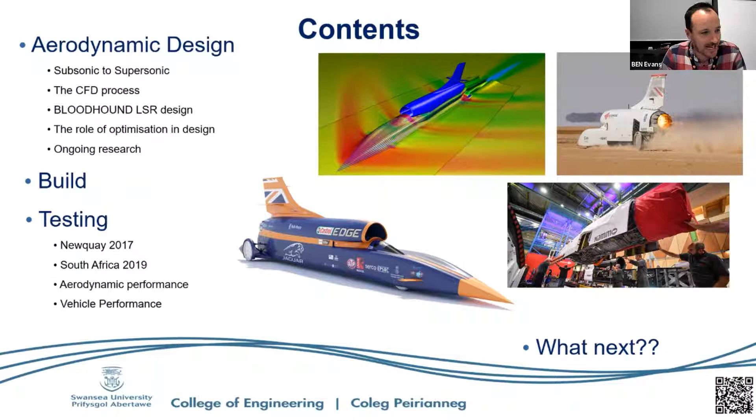So just in case there are any of you out there who aren't sure what the Bloodhound project is all about, or need a little recap, I'm going to play you a short movie. I'm going to cross my fingers that all of the streaming and audio works on this. Hopefully this will give you a feeling for what this project is all about from a technical engineering perspective.

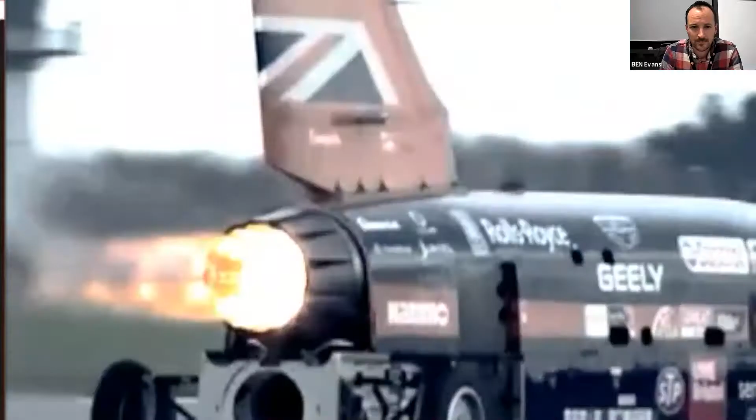So I hope that has whetted your appetite for what is to come.

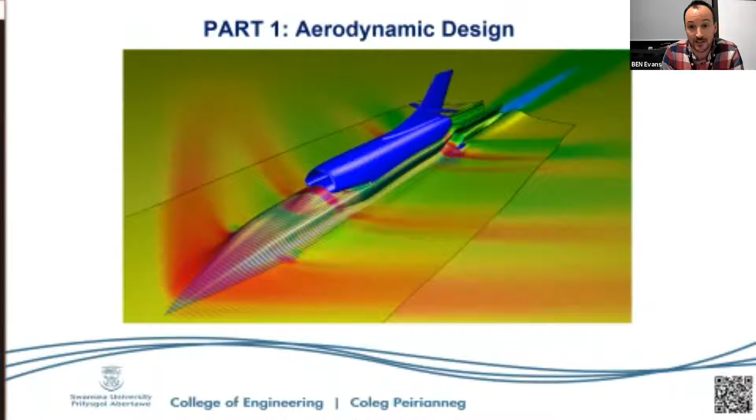Part one of this talk is all about aerodynamic design. When we were approached here at Swansea University back in 2007, I was just coming out of my PhD years, and we were asked to take the lead on the aerodynamic design for this new initiative of Richard Noble, a very brave, adventurous chap who held the land speed record back in the 1980s, was the director of the Thrust Supersonic Car that still holds the land speed record today. And we bravely, or foolishly, depending on which way you look at it, took him up on that challenge.

We said, okay, we've got the technology here to do this, we'll help you out. But it quickly became apparent to us that this was a massive undertaking. The ambition back in 2007 was to design the fastest car in the world, a land speed record vehicle capable of 1,000 miles per hour across the surface of the Earth.

To put that into perspective, at that time and still to this day, the fastest car that had traveled across Earth as a land speed record car was Thrust SSC, reaching speeds of 763 miles per hour, just above the speed of sound.

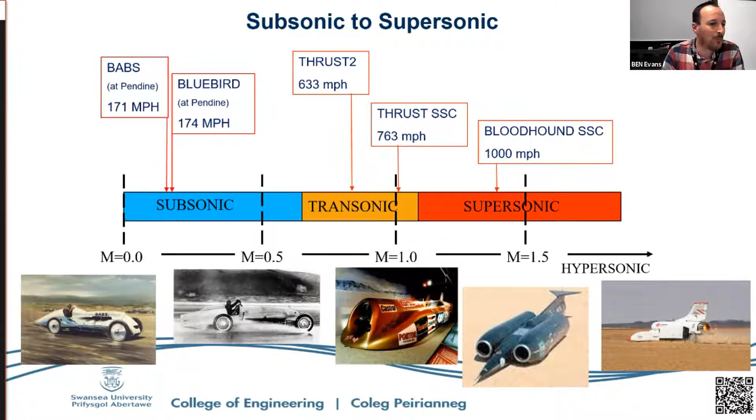But when we started looking at this and how much of a challenge this is going to be, we quickly realized that to push deep into that supersonic speed regime, where you're traveling significantly faster than sound itself travels, was going to be a task.

At these kinds of speeds, vehicles, which are usually aeroplanes, generate shock waves. Those shock waves are very sudden, almost instantaneous changes in the pressure field, the distribution of pressure around the vehicle. Of course, aircraft have the luxury that they're out in the atmosphere, they've got a lot of space around them, so these shock waves can fan out around the aircraft.

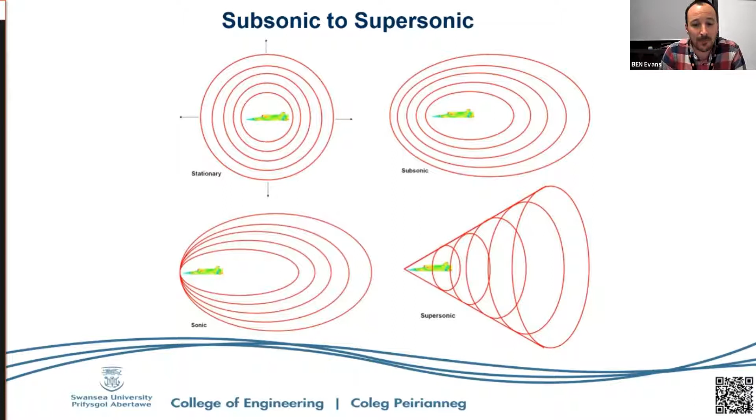But by definition, a land speed record vehicle is a car on the ground. And it quickly became apparent to us that trying to get our heads around how these shock waves would interact with the ground plane across which the car was rolling, whether those shock waves would reflect off the ground, damage the ground, affect the wheels, and the way the wheels interacted with the ground, was going to be a big part of understanding whether or not this was even possible.

In the past, certainly going back 20 or 30 years, automotive aerodynamic design or aerodynamic analysis would have been done using a real physical wind tunnel. Now, we chose early on not to go down this road with Bloodhound for a whole bunch of reasons, one of which is they're very, very expensive. We do have an impressive suite of wind tunnels here at Swansea University.

But unfortunately none where you could, first of all, get the flow speed up to supersonic speeds, and more importantly, or a bigger challenge again, actually roll the ground plane underneath the model at supersonic speeds. They're not only extraordinarily expensive to use as a design tool, they're very slow to use because every time you want to test something new, you physically have to change the model, manufacture a new model, or tweak the model in the real world.

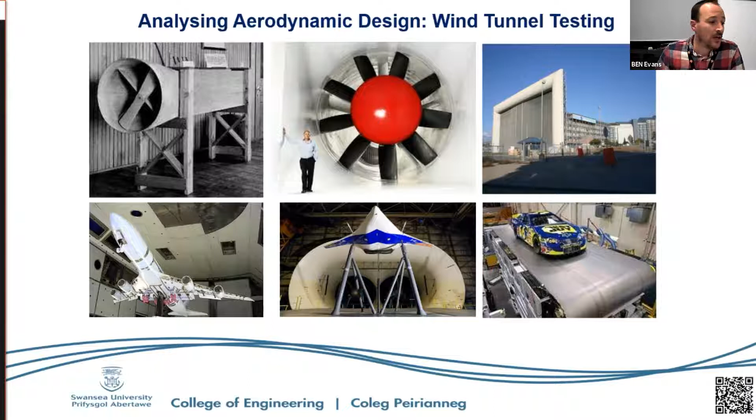So we decided all the way back in 2007 that the way we were going to design this car from an aerodynamic design perspective was using computer simulation. We are extremely fortunate here in Swansea to have world-leading computer simulation technologies at our disposal.

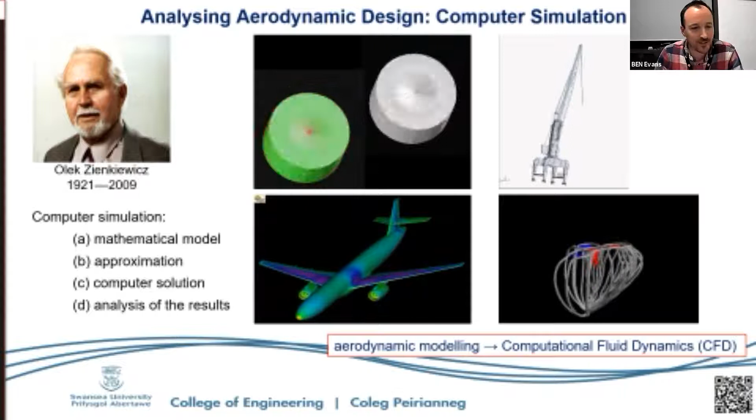I was lucky enough to spend quite a bit of time with Olek in the last few years of his life. Every Friday afternoon, I would go and see Olek at his home in Mumbles, a little village just outside Swansea where he lived. Although his health and eyesight were deteriorating towards the end of his life, he was as bright as a button and was still getting lots of correspondence from academics around the world asking him for his advice. I used to sit with him in his study and read letters to him, and he would dictate responses for me to write. So I got to know Olek very well.

And he pioneered a lot of the tools that we've used on Bloodhound.

Now, essentially, computational or computer simulation boils down to a number of steps. Whatever method you're using, it basically boils down to: do we understand this problem well enough, do we understand the physics well enough to describe it mathematically? Can we write down a set of equations that describes the phenomenon? That's the first challenge.

If you can do that, we then ask ourselves: can we solve this equation? Very often in the real physical world, those equations are complex, coupled, often differential or partial differential equations. We come to the conclusion that it's very, very difficult, if not impossible, to solve them exactly. So instead, we solve them approximately, coming up with approximate solutions to those equations.

We then realize that in order to even get approximate solutions to those equations, we're going to need some very powerful computers. That's where computers step in and help us out. And the final part of the process is to look at all the data that these computer simulations provide us with, and do something with that - visualize it or process it.

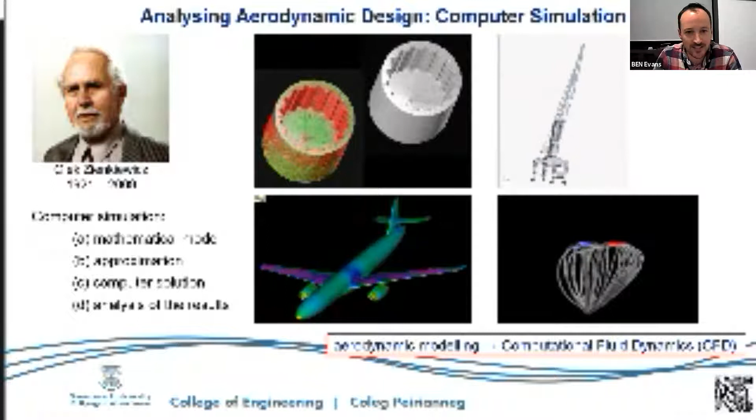Now, in the context of aerodynamics and aerodynamic modeling, we call this field computational fluid dynamics, or more easily the acronym CFD. So when you hear me this evening talking about CFD, this is exactly what we're talking about - it's virtual wind tunnel testing, essentially.

Now, as I mentioned at the start, I'm not going to go into too much detail this evening on the actual CFD method we've used, because over the years I've given many, many lectures going into the details of this. If you're particularly interested, there's a reference to a paper we published almost a decade ago looking into the specific methods we've used.

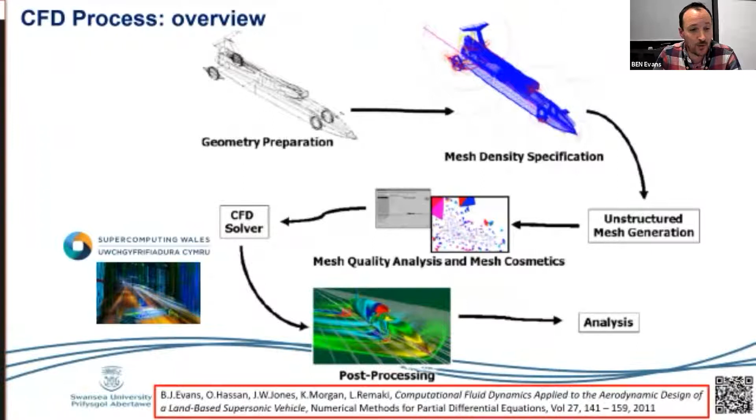But it is worth mentioning this evening that we had a lot of support over the years from a whole range of people providing us with computer resource, one of which is the Supercomputing Wales organisation, who provided us with one of the largest supercomputers in the country to run our simulations on.

Now, at the end of the CFD process, the thing that we actually study as aerodynamic designers to help us evolve the design of a vehicle, in this case Bloodhound, often looks something like this. What we've done with the data from the computer simulation is process it so we can see the pressure field - on the far left, the underside of the car, and on the right-hand part of that figure, the actual surface the car is rolling across.

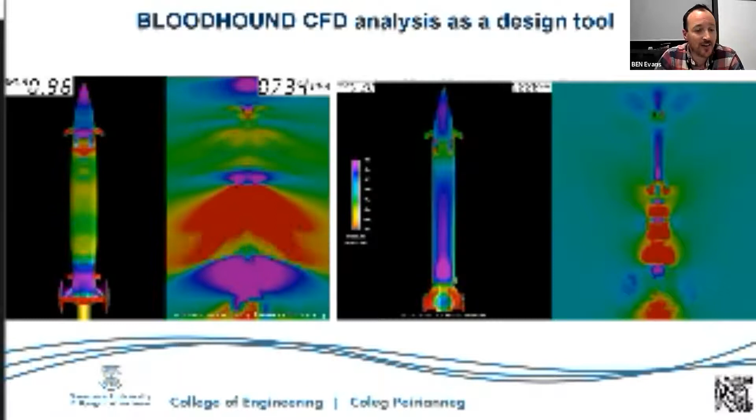In this image, what we're seeing animated on the left is one of the very early configurations of Bloodhound, before we'd solved a lot of the aerodynamic headaches we hit up against. You can see, particularly at the back of the car, the underside, that there are some big changes in the pressure the underside of the car is experiencing.

And those pressures translate into forces. So we were also predicting huge force changes as the car accelerated from low subsonic through to supersonic speeds. We use this sort of analysis to help us evolve the design of the car - I'm hoping we're going to see this.

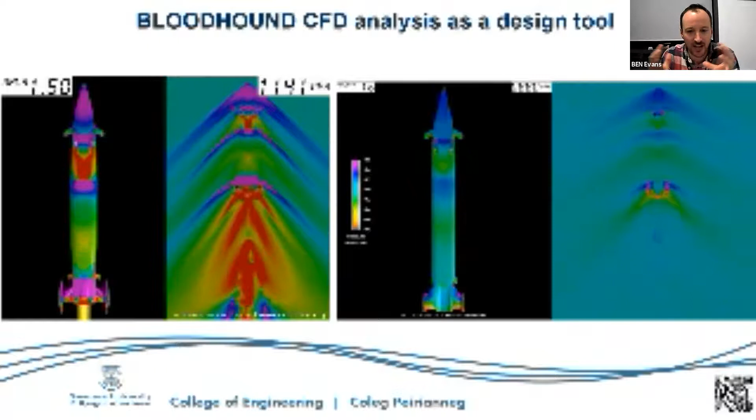So on the right-hand side, there are some subtle but significant changes, particularly at the back of the car, which is at the bottom of the vehicle in this image. One of the things hopefully you can spot is that the size of those pressure variations as the car is accelerating, as the Mach number is changing, are massively reduced on the right-hand side. And that was one of the big headaches we had to overcome during the design process.

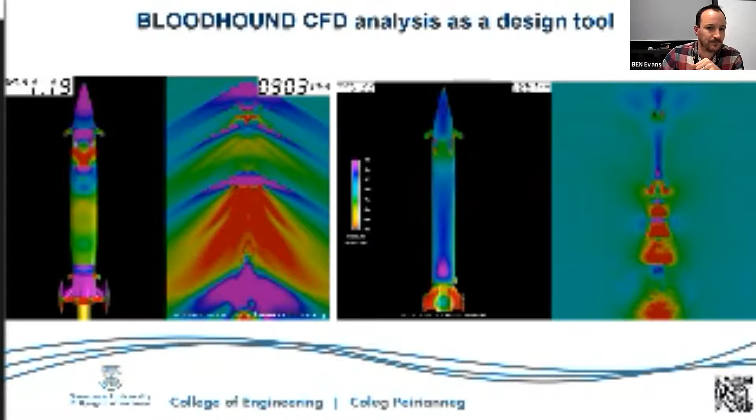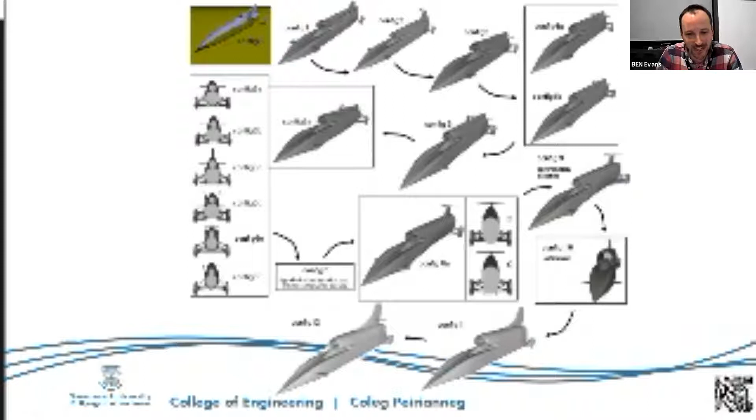So to cut a long story short, we went round this design loop many, many times. Between 2007 and 2015, over 7 or 8 years, we went round this loop. What's displayed here looks like 12 times, but in reality it was a lot more. Every time we changed something to do with the external geometry of the car, it would come to me, we'd run our suite of CFD simulations to understand the aerodynamics, and then I'd provide guidance to the other engineers on where we should go next. Eventually we ended up with the final configuration, config 12, which was the car we actually built.

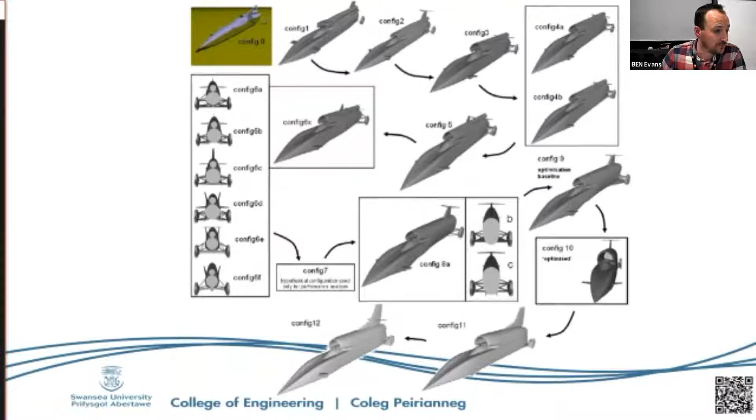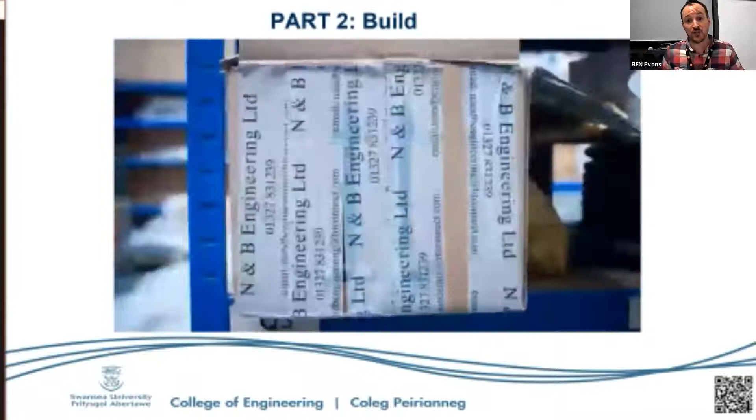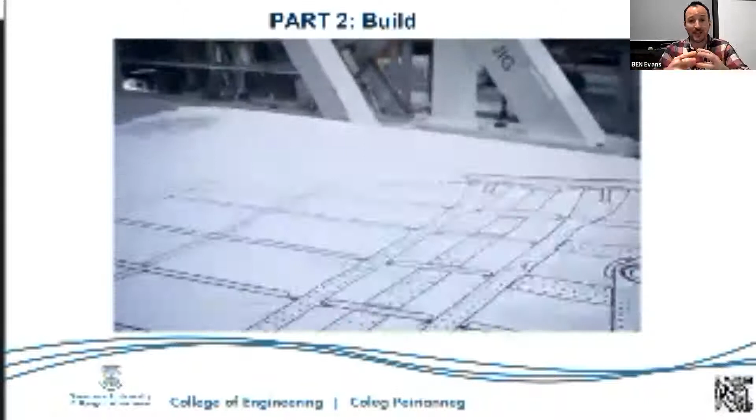This is the point in the process where I got to sit back and relax. We're talking about 2015, 2016, that sort of time, where we here at Swansea provided the outer mould shape the car needed to be to keep drag as low as needed, and also a shape where we could control the lift acting on the car and its distribution, all the way from low speed up to Mach 1.3.

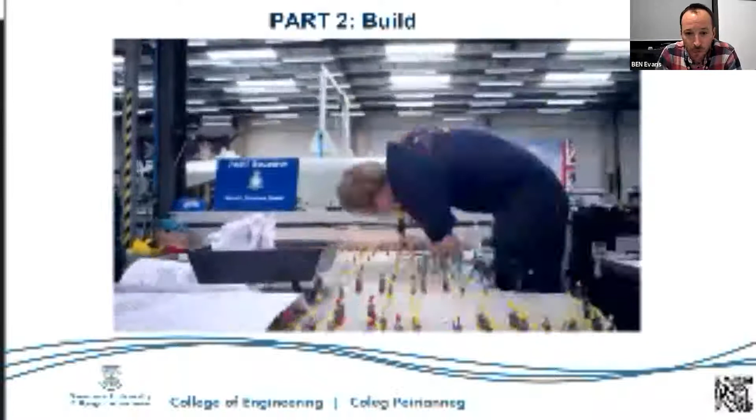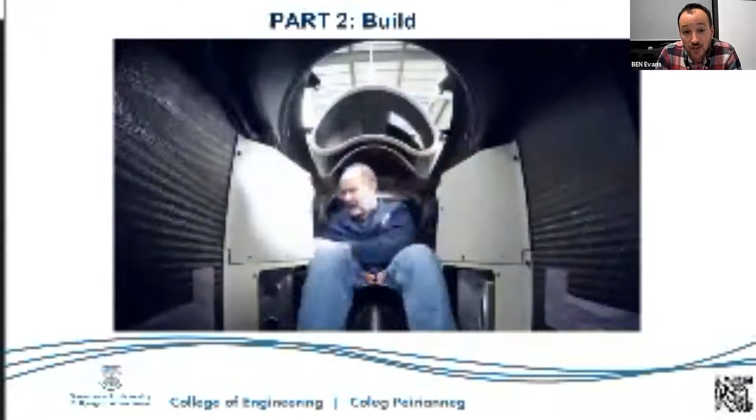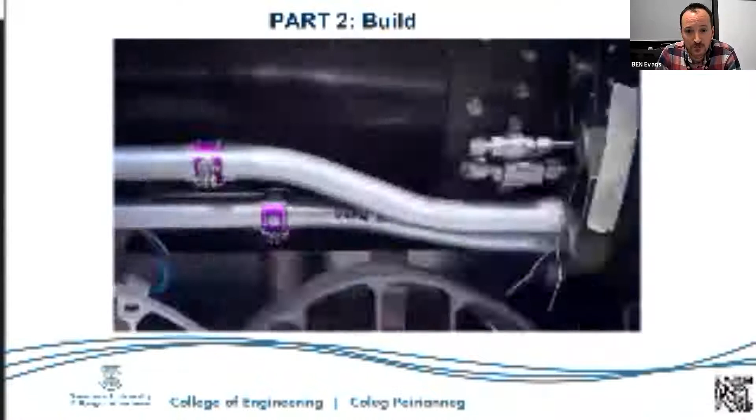We handed that design over to a whole team of engineers, far cleverer than I, in terms of how you actually design and build the underlying structure of the vehicle. It took us 2 years to get the car built. It took that long for the same reason lots of things have taken a long time on Bloodhound, because we were completely reliant on external sponsors providing us with parts and materials. What was available to us for free dictated some of our design decisions.

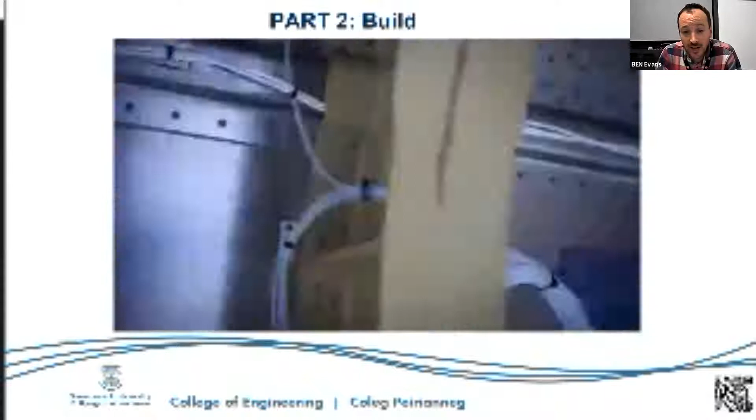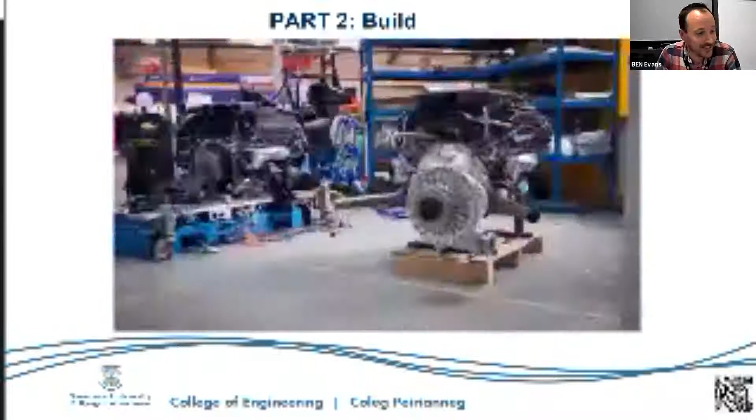The wheels on the car, for example, in the earliest configurations of Bloodhound were pure titanium. When we needed to get the car built, we started asking companies around the United Kingdom if they were willing to donate 4 large blocks of titanium for free. We didn't get very far, so we ended up having to redesign and look at an aluminium alloy design instead.

In terms of the underlying structure and build of the car, it's basically a car of 2 parts. The rear half, as you can see here, is a metallic space frame type structure, very similar to the type beneath the skin of an aircraft or aerospace vehicle, and it's that metallic frame that's translating the stresses and loads through the car. The front half, however, is a carbon fiber monocoque, very similar to the way a Formula One car is designed today, so the carbon fiber skin itself is transferring loads through the vehicle.

The reason we made that decision is that the back half of the car has lots of components we knew we'd regularly need access to, things like the jet engine, the rocket systems, hydraulic systems, fuel pumps, and so on. The carbon fiber solution at the front is brilliant until you decide you need to start punching lots of holes in it to get access to things inside. The front has our driver Andy, who needs access to the cockpit, but also fuel tanks, electrical systems, and steering systems, which were bits we wouldn't need to access so regularly. That's why we went for this half cutting-edge motorsport, half cutting-edge aerospace design.

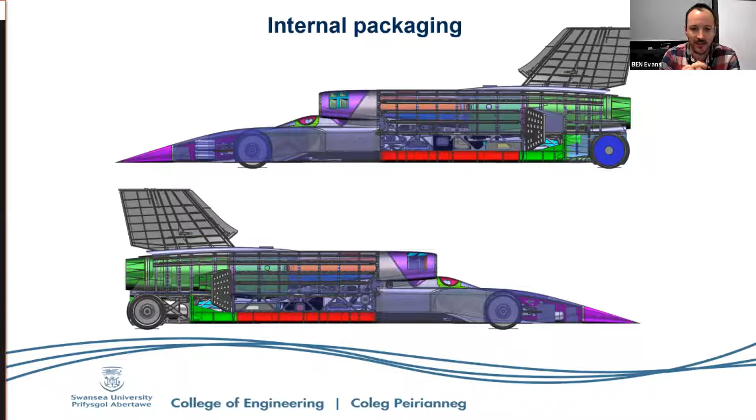And then, of course, it was time to see if Bloodhound could do what we, in terms of the aerodynamics, had been promising it would be able to do. The first thing we did was take the car down to Newquay in Cornwall, just to run some shakedown tests to make sure that the steering system worked.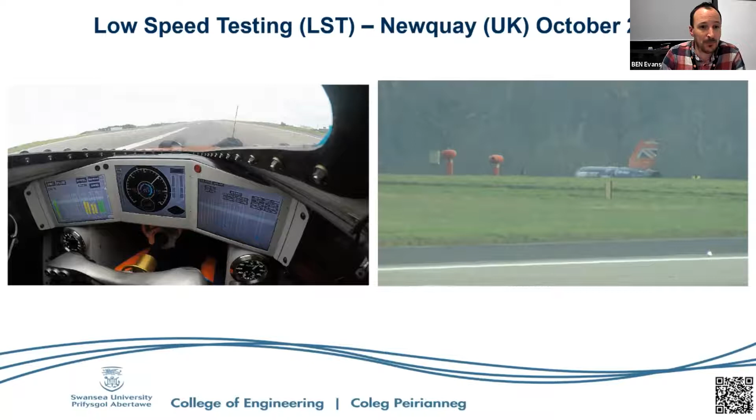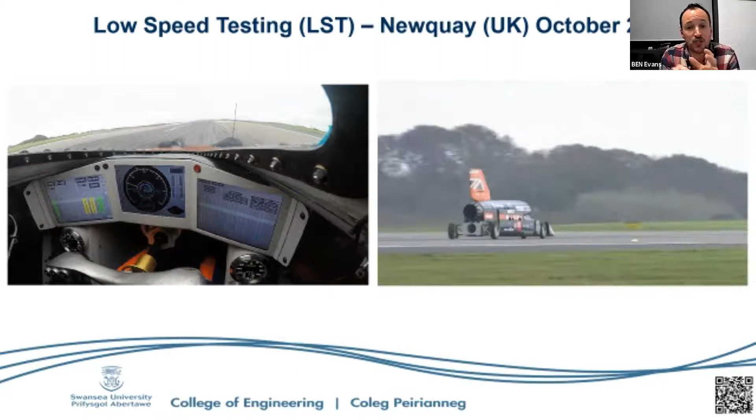We wanted to know a couple of things. One was, could we get full afterburn or full reheat thrust from our EJ200 jet engine from a standing start? You'll see the nozzle contracting, the car starts rolling almost immediately, and the reheat kicks in, giving us full thrust almost from a standing start - which we didn't think we'd be able to do. We thought we'd have to gently bring the engine in, so as not to choke the intake. But that was brilliant news from an aerodynamics and performance point of view.

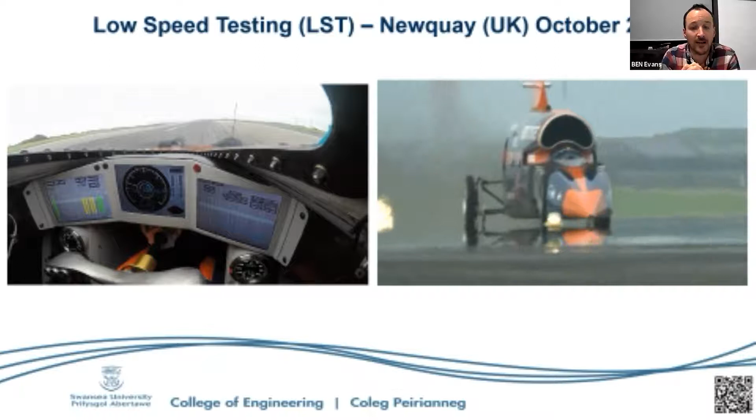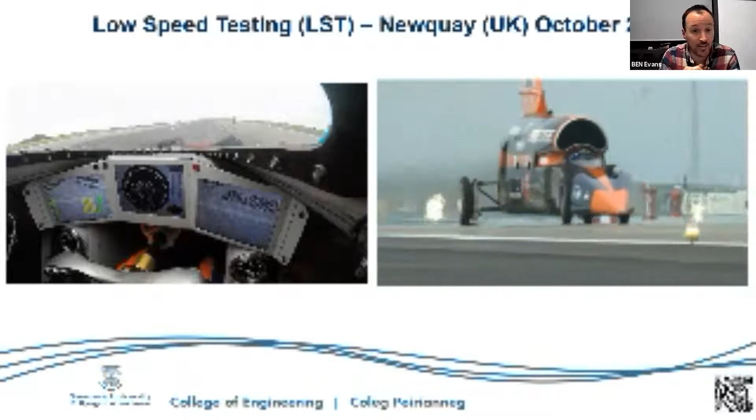We also wanted to figure out how well the wheels brake. We've got fairly conventional brakes on the front wheels of the car, to bring it to a stop at low speed trials, around 200 miles an hour. We just wanted to make sure they worked on the runway, and they worked brilliantly.

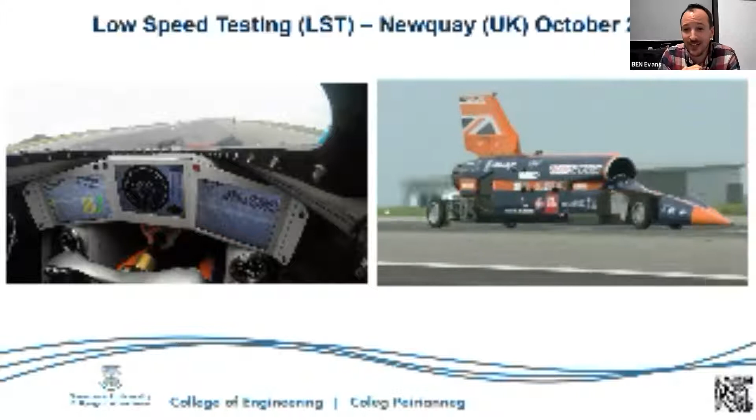So from an engineering point of view, and also from a spectacle point of view, the trials in Newquay were a phenomenal success. We attracted tens of thousands of people down to watch this.

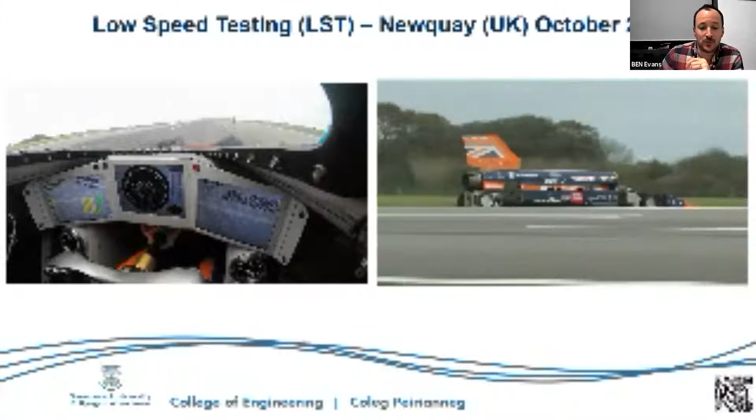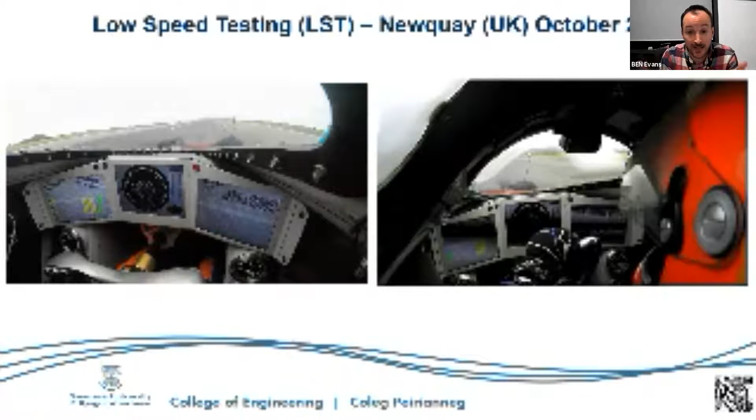For me, this was the first time I'd seen this car in reality. I remember standing alongside the runway, after a decade of working on Bloodhound, where it had basically been images on my computer screen - Bloodhound had never been much bigger than my computer screen. And all of a sudden, here's the real thing, 13 meters long, creating an awful lot of noise. It all suddenly became real.

But one of the things we discovered at Newquay was something I was completely wrong about in the run-up to our low-speed testing. I'd been saying to the team in the couple of years leading up to this, where getting sponsors was a real challenge - it's always been a real challenge on Bloodhound - that as soon as we get this car built, even the bare bones of Bloodhound, and run it down a UK runway with a big flame out the back, all our issues about getting sponsors would go away. There would be companies queuing up to put their name on the side of this car.

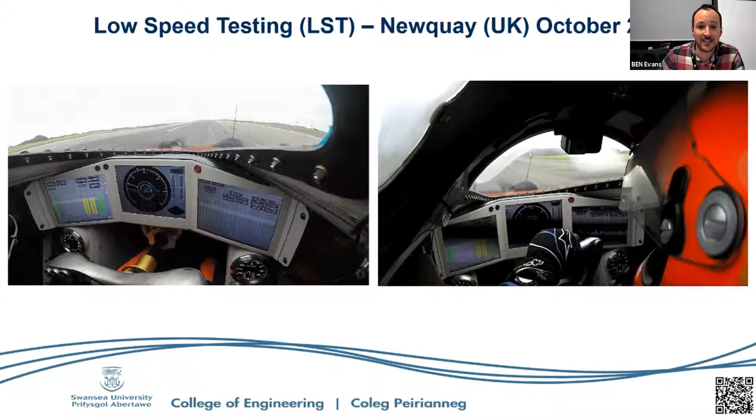And in fact, the opposite happened. I think the main reason is that it all became very, very real, and the risks and danger involved in putting a human being in a car like this - and then us saying, well, you've seen it at 200 miles an hour, we're going to take it 5 times faster - in fact scared sponsors away.

So as many people will know, a year later the project did run out of money completely. It went into administration. We thought it was the end, until a very brave chap called Ian Warhurst, who we'll see a bit later on, stepped in and said this is crazy - you've got a car here with the potential to be the fastest car in the world, and the administrators were on the verge of cutting it up for scrap to extract some of the high value components, like the jet engine.

So we went from the project is over, to there's money in the project, we're going to South Africa to see what it can do and start the high-speed testing program, in the space of a few days. Over those few months from the end of 2018 and early 2019, we started preparing the car for its trip to the Hakskeen Pan in South Africa. Now, this is an incredible place.

We'd been preparing this site for a number of years in the lead up to the high-speed test program. It's brilliant for land speed record testing for a number of reasons. It's large, the pan itself is 12 miles long with overrun at either end of the track, and it's incredibly flat. The elevation change of the pan over scales of a couple of kilometers is of the order of centimeters. And it's a solid surface, but soft enough to allow our solid metal wheels to bite into the surface to get some grip.

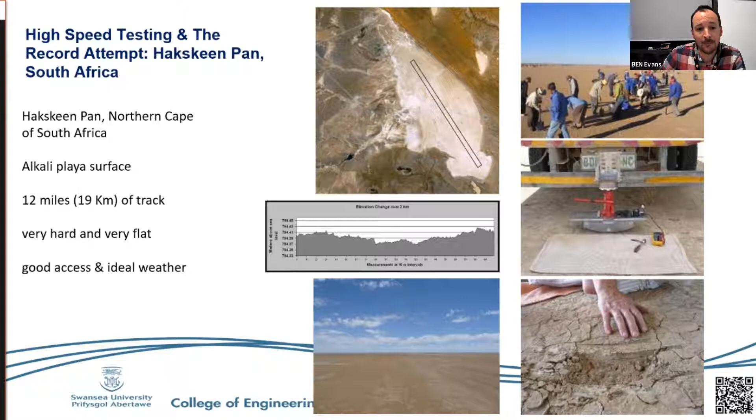So we took the car to South Africa to see what it could do. When we started getting data back from the car, I was quickly very relieved. So what I'm going to show you now is a short video of me talking to you from South Africa during the testing program back in 2019.

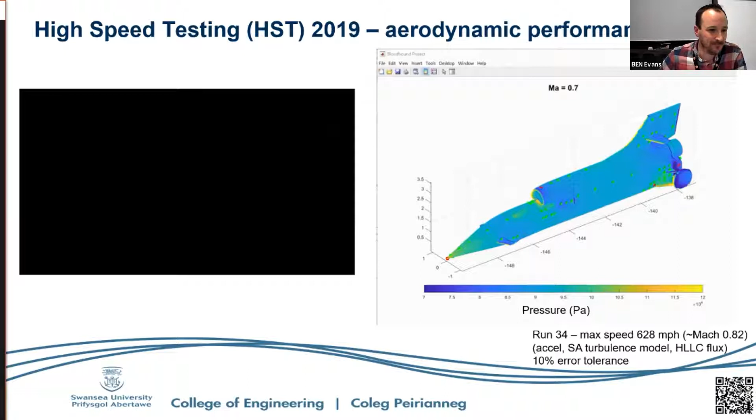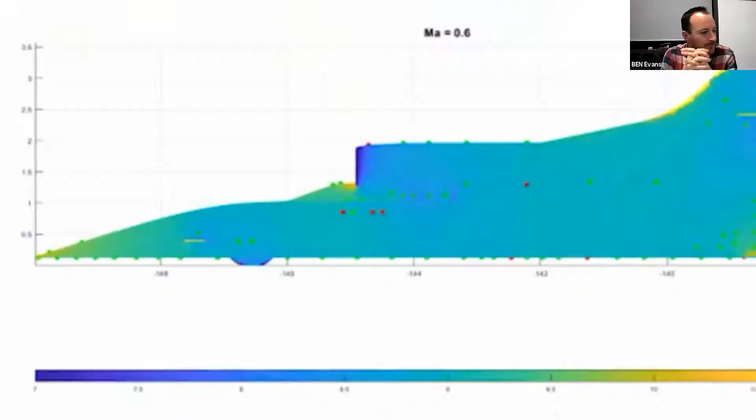So my name is Dr. Ben Evans, I'm an associate professor in aerospace engineering at Swansea University. The exciting point we've arrived at now with Bloodhound, as one of the people involved in the aerodynamic design of this car, is we are taking Bloodhound into the real world. It's been a theoretical model on a computer screen for a decade, where we've been predicting, using aerodynamic computer modeling, the pressure distribution over the surface of the car.

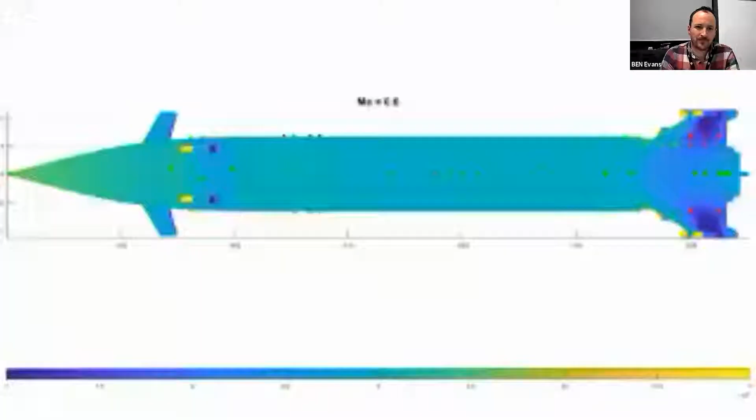What we've got now is the world's fastest aerodynamics laboratory. This is, as far as I'm concerned, a piece of scientific equipment where over the surface of the car we've got almost 200 pressure tappings at critical points, where we want to measure the pressures on the surface of the real car and compare that with the computer model we used to design it in the first place. What I'm hoping, and what we're seeing so far, is that the mapping between the real world measurements at these pressure points and the computer model we used to design the car is matching very well together.

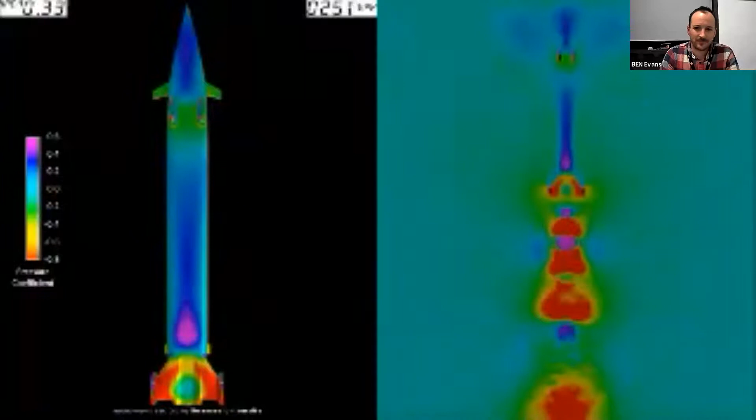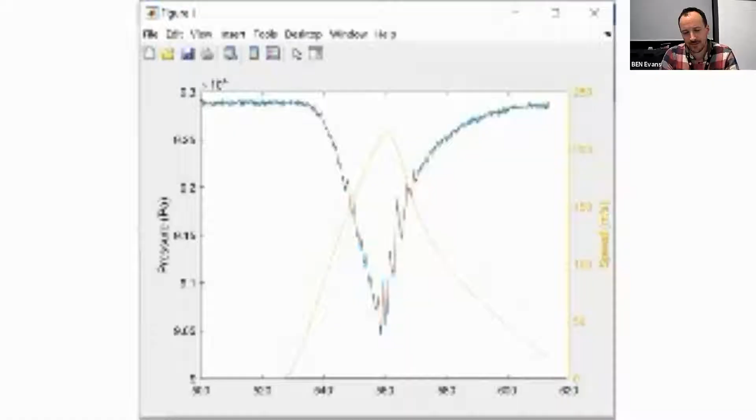That's up to Mach 0.6 as far as we've pushed the car so far. And what I'm hoping is that we continue to see that close mapping as we accelerate the vehicle in future tests. So what I'm looking at here is a comparison of the actual data we pull off the car compared to the CFD simulations we've done in the years leading up to the project coming out to the pan. This is really a big moment in terms of making sure that the models we've based the entire design of the car off, and the entire performance we can expect, match the actual data we're seeing here on the pan. So far they're matching up really well, which is very reassuring.

So as you can see from this plot, you can see the colour mapping over the entire car - that's the CFD predicted model. Because it's a computer simulation, we can see everywhere all over the car. On the actual car, we can only see at particular points where we've put holes into the car and measured the pressure there. So what you're seeing here is all of these points across the car - if they're green, they're within our tolerance band, and if they're red, they're outside. What you can see here is a nice green Christmas tree effect, which means everything's looking good.

I can't begin to explain the relief I felt when we started pushing the car up to significant speeds, where the pressure distribution we'd been predicting over the surface of the vehicle was becoming interesting. We were seeing plots like the one on the right-hand side, where at the various pressure sensor locations across the surface of the car - there were 156, I think, from memory, of these sensors - the vast majority of them were within 10% in terms of the absolute pressure being measured compared to the prediction that the CFD model we'd used to design the car had been predicting.

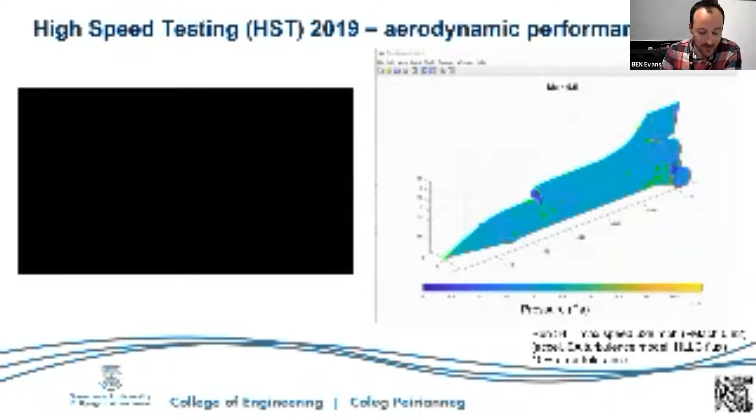It wasn't perfect, nothing ever is. What we spent quite a bit of time doing while we were out there - and you met Jack, one of my research team, his job title is Data Boffin - was we would look at plots like this, where we'd take the data from all 156 sensors at different speeds the car was traveling at, under different configurations during acceleration and deceleration, and look at what were the pressures we were measuring at different points on the car against what we had been predicting from the CFD model.

Of course, if you had a perfect alignment between those two data sets, all of these points you're seeing on these graphs would sit on that nice y = x line. They don't, it's not perfect, but the correlation was significant enough to give us confidence that the CFD model was doing a very good job of predicting what was happening to the car.

We're engineers, we want to understand everything, so of course we did look at some of our worst case sensor locations. A lot of the time I spent going, okay, here's a position on the car where what we're measuring from the sensor isn't aligning very well with the CFD model. Very often you'd go look at the car, find that sensor port, and discover it's completely clogged with dust, or there are particles blocking the tubing. So it's actually experimental error causing that misalignment between the measurement and the CFD model.

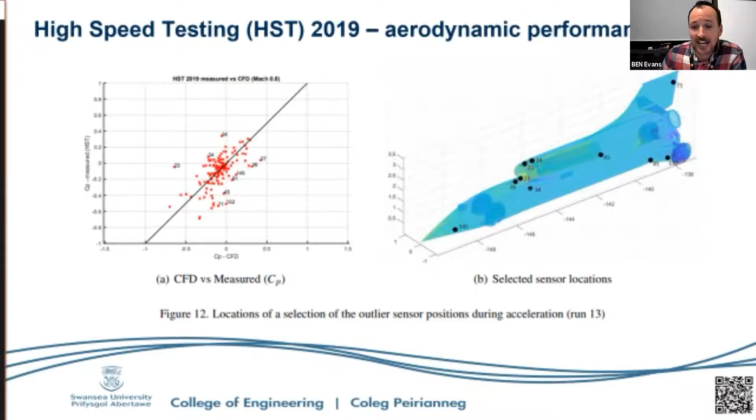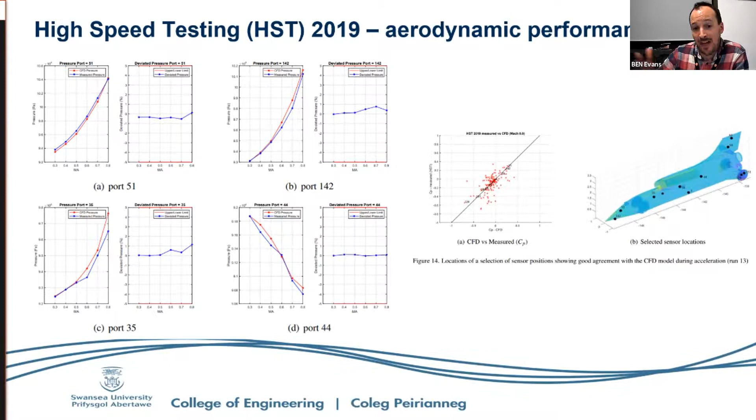This is work that's ongoing, we're still trying to fully understand all the data we got from Bloodhound. It's reassuring that the vast majority of sensor locations over the car, when we plotted them, showed good agreement - the important graphs are the ones with the red and blue curves on the left-hand side. The red curve is what the CFD model was predicting in terms of pressure as a function of Mach number on the x-axis, and these show where that mapping was very, very good indeed.

One of the other things we were measuring on Bloodhound during the high-speed test program were the loads on the wheels themselves. We had load monitors we could infer from suspension deflections on each of the 4 wheels, because from a safety point of view, you can naively say, well, as long as you keep all 4 wheels on the ground, and ensure there's positive load acting on all 4 wheels, there's nothing to crash into because we've got this great big open pan. As long as the 4 wheels are always touching the ground, what can possibly go wrong? Obviously it's a little more complicated than that, but that was one of the things we were measuring at all times.

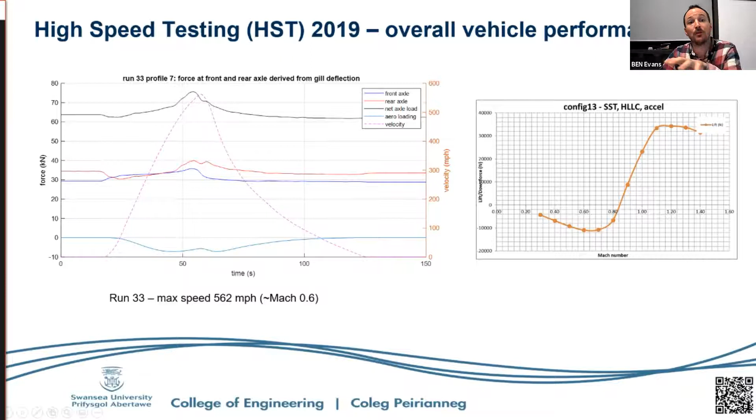And in fact, as the car pushed faster, this is the final 628 mile per hour run that we did, that camel hump phenomenon you see here in the red curve is even more pronounced. We hit this maximum downforce point, accelerate through it and lose some downforce, then regain it as we decelerate down.

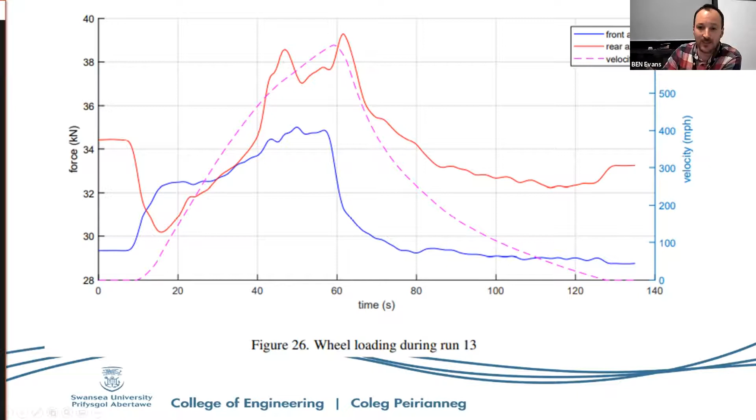Seeing that kind of correlation between our predictions over a period of 10 years come into reality on the desert was incredibly reassuring. By the end of the high-speed test program we were also able to take all of the data from our CFD models, particularly the drag prediction, and feed it into an overall dynamic performance model for the car.

For those of you who are a bit geeky like me, we basically did this in MATLAB, and the way we did it was just to integrate Newton's second law, force equals mass times acceleration. So we'd feed all of our predicted forces in - some of them predictions on jet thrust, some on aerodynamic drag and rolling resistance. By the end of the process, our model was able to incredibly accurately predict the performance of the car.

Don't worry too much about the dotted lines here, which relate to jet thrust. What's important is that we were able to do this modeling so that before a run, if we wanted to hit, for example, 628 miles an hour, we could predict for how long the jet engine would need to run to get that speed, importantly where on the track we would hit that speed, and then how long it would take to decelerate back down to zero. That was an important development we achieved during the high-speed test program.

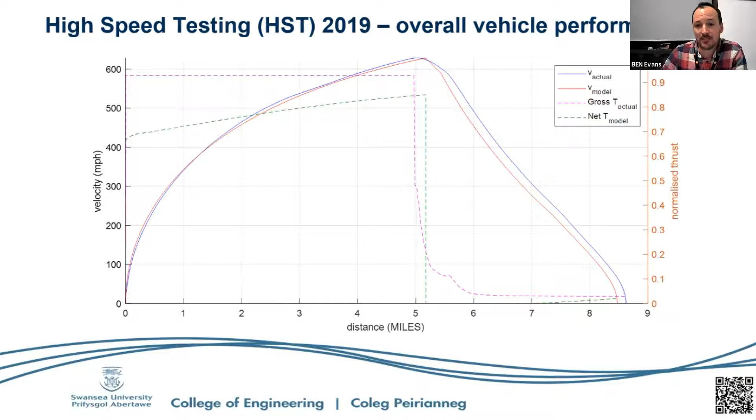Just to give you a feel now, before I wrap up and give you a hint at what the future might look like for the project, let me show you this final little video that will give you a feel for what we managed to achieve while we were in South Africa in 2019.

Convoy control, approved transit track gate northern corridor start point and report in position. Driver is now in Bloodhound. Over. Convoy control, good morning. Temperature is +25 and pressure 921 millibars. Check that.

Stop that video there just to make sure that I leave enough time for some questions at the end.

So it was a phenomenal success. We came back with everything we wanted. And then at the point where we were saying, we've de-risked the project, we know this is going to work, who wants to come on board as a sponsor? We've got a blank side to the car.

COVID hit. So you may well have seen in the news this week that the project is now up for sale. So within the next 12 months, we are going to discover whether or not someone steps up to take this on, and we take the car back to South Africa to attempt a land speed record, with the first target being 850 miles an hour. Or there is a spot for the car in the Coventry Transport Museum, which is where Thrust SSC lives.

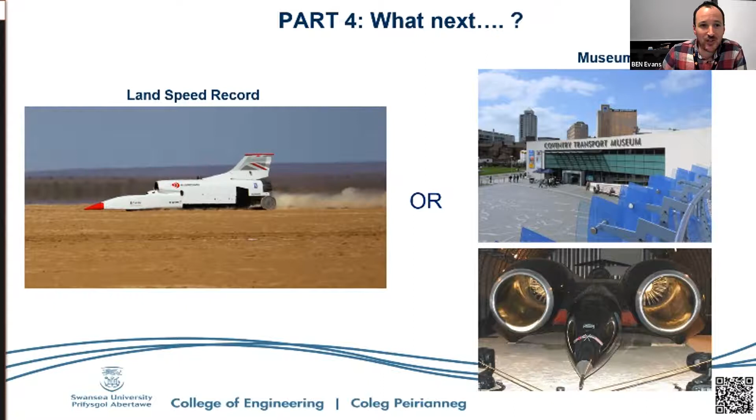I hope it's the former of those two, of course, but just like everything to do with Bloodhound, we just don't know where we're going next. That question I keep getting asked is, is a 1,000 mile per hour run possible? Based on what we learned during the high-speed test program, the answer is yes, just about. It would be very, very tight if we ever did get to the point where we could attempt a 1,000 mile per hour run.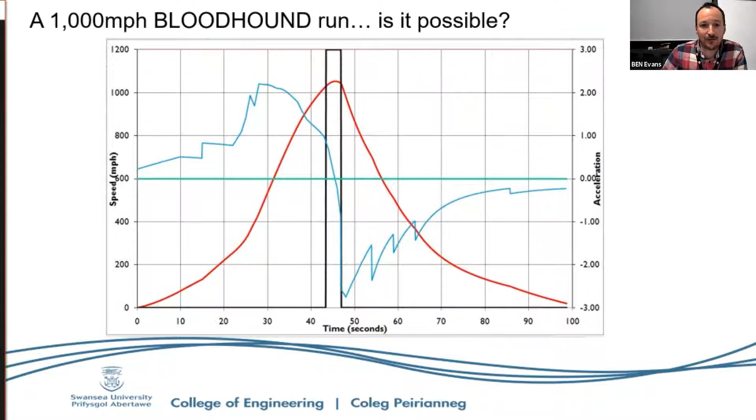The car is capable of it. The big question is, do we have enough track at Hakskeen Pan to achieve it? So where do we go from here?

In terms of my work, what's as exciting as what's been happening with Bloodhound is that we're working really hard to spin out some of the ideas, methods and technologies we developed specifically for Bloodhound into other more conventional applications, like the Reaction Engines Skylon spaceplane, which I'm currently working on. We've also developed a partnership recently with a company called Faradair to develop a bioelectric commuter aircraft, and we're applying some of these techniques to the design of high-speed hulls on motorboats.

So there's lots of exciting research that has been inspired by Bloodhound, whatever happens with the Bloodhound project from here, which is great to see.

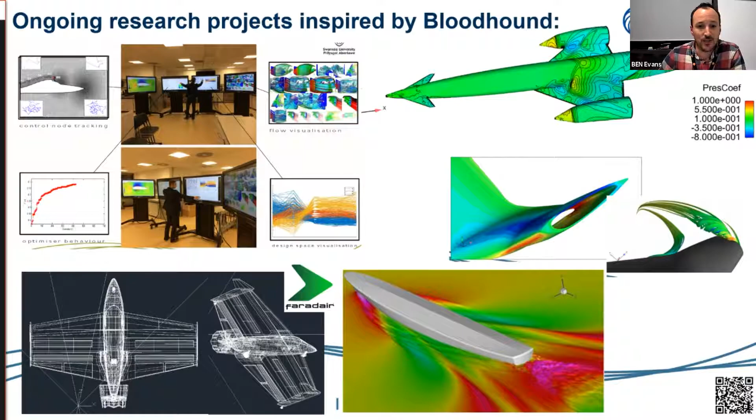So I'm going to stop talking there and just say diolch am wrando. Thank you very much for listening.